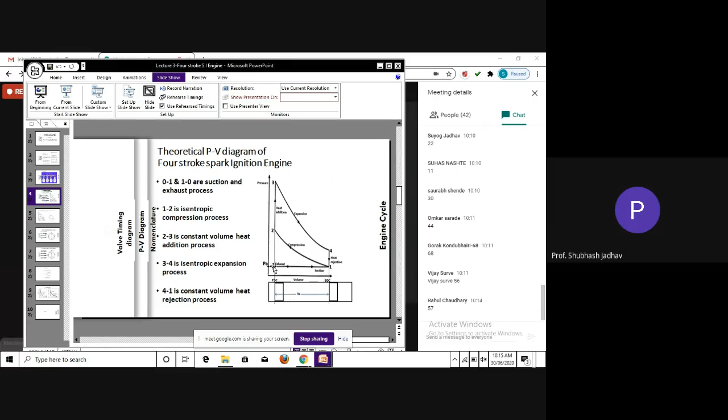And this 0 to 1 and 1 to 0 we generally don't show in our theoretical Otto cycle. So that becomes a very important thing which you have to remember.

And after understanding this particular PV diagram or Otto cycle, then we said in a similar manner we can go for discussion of the diesel cycle also. So you can see over here a comparison of the Otto cycle and diesel cycle. You can see a similar, the same figure I have put over here.

Here you have the suction, compression, heat addition, expansion, heat rejection, and the exhaust process.

Similarly, here 0 to 1 will be suction. During suction, the piston moves from TDC to BDC, so suction is happening. Remember, in a diesel cycle we are not allowing an air fuel mixture, rather we are allowing only air to come into the cylinder. So air is sucked into the cylinder in the process 0 to 1, corresponding to intake or suction process.

Now 1 to 2 is your compression, isentropic adiabatic compression. Why didn't we discuss adiabatic earlier? Adiabatic means we are not allowing heat to cross the boundary, correct? So through the boundary of the system, heat is not allowed to go out. We ensure that whatever heat is being produced is retained inside and takes part in the process. So that is why we call it adiabatic, and ideally we are assuming it to be adiabatic.

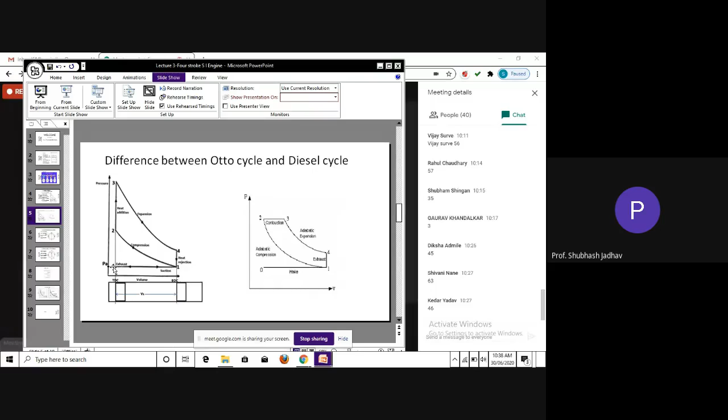So this we are talking theoretically. When we put the same thing in a graphical representation, it is what we call a timing diagram. Let us start initially.

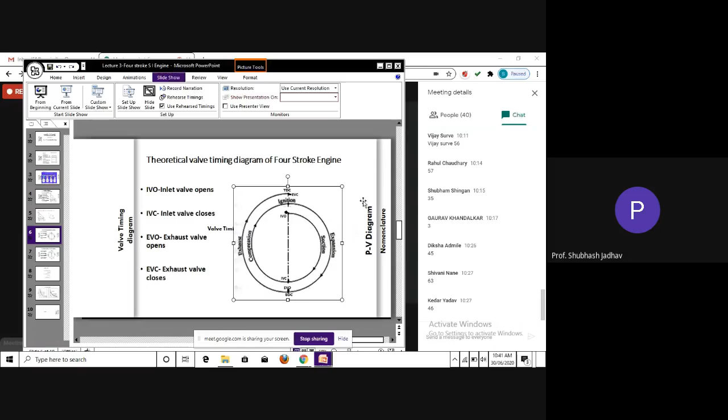And we can see over here ignition is going to be there - spark is going to ignite. This is the point at top dead center. At point 2 we say we are giving the spark theoretically, correct? So the spark is given over here, denoted by ignition.

So at the top dead center, that is, we generally say at the end of the compression stroke, the spark is given - that is, ignition is happening.

Now why does this word ignition come in? Ignition is the process whereby we ignite the mixture, we burn the mixture, with the help of a system which we call an ignition system. That is where the word ignition is coming from.

Till now we were just using the word burning or giving spark. The spark word comes from the process of giving the spark in order to burn. So spark happening and ignition happening are one and the same. So it is ignition over here, and at point 2 we have ignited it.

Still both valves remain closed, and here combustion starts. In a 4-stroke SI engine, we assume that the ignition is going to happen instantaneously at point 2, so the piston is not moving. All the combustion is going to happen over here only, and thereafter the expansion is going to happen.

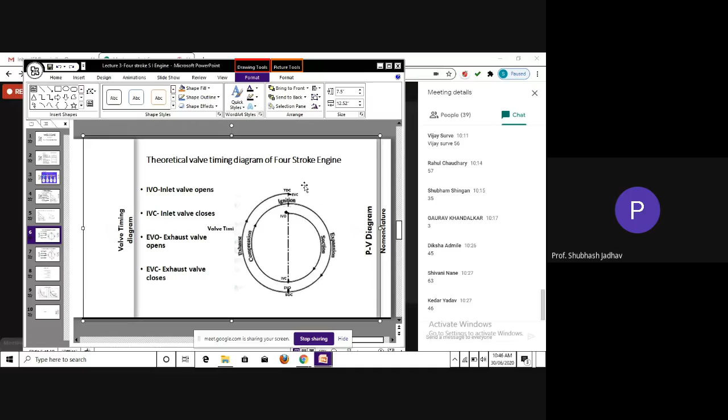So this is very important, underline the word theoretical. This is a theoretical valve timing diagram. Theoretically it should happen like this, but not necessarily in practice. It may happen differently. So theoretically, we have suction, compression, expansion, and exhaust happening, and correspondingly we have this particular theoretical valve timing diagram.

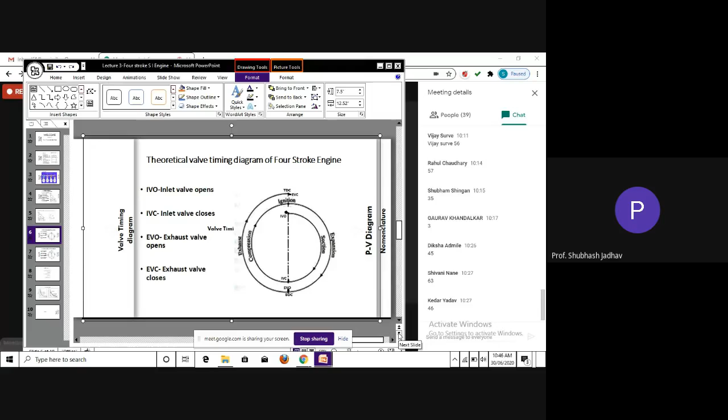Now this is your actual valve timing diagram. Before going to the actual valve timing diagram, we have to understand why there is a difference between the theoretical and actual valve timing diagram. Now earlier, in our earlier cycles, we discussed about this, so let me check if that PPT is with me, so that we'll be able to understand properly. One minute.

Okay, so this is the arrangement where we operate the valves, correct? Now here you can see in the theoretical diagram, we are assuming that we open and close the valves at dead centers, either top dead center or bottom dead center. So either opening or closing is generally done at a dead center, which means it is instantaneous.

But you can see over here, this is a mechanical operation, and the mechanical operation cannot be done instantaneously because it has some inertia. So if there's inertia and you are applying a force, remember, you have to slowly go on increasing the force, and then it will start moving. Until it moves, it will consume some amount of time. That means there will be some amount of time required due to its inertia. That's the first thing.

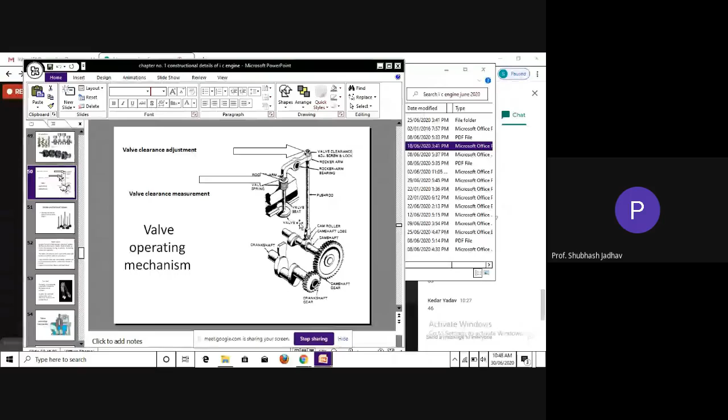Okay, so these are the cam lobes, which are going to make the valves move. Now you can see over here, this is a cam lobe. This is called a cam lobe. This is a cam shaft.

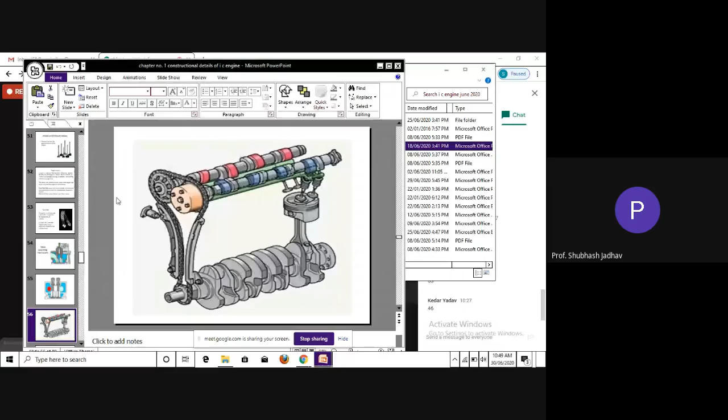Now here it is up to somewhere having the same diameter, but here the diameter is going to increase and become maximum over here, so it is clearly visible. You can see from here to here it is increasing, and then it is going to decrease. So this is the region where it is going to lift.

Since the diameter is increasing, the follower is going to be lifted up. That means there is the inertia of the follower coming into picture. So if the follower is supposed to be pulled, the inertia has to be taken care of, and due to that we cannot make it move suddenly. So we have to go slowly, which means it will consume some amount of time.

Moreover, what is the shape of the cam? The cam is something like here. It will be initially half of the part. Let us assume it is circular, and then it will be like this. This portion is called the cam lobe. So this particular cam lobe, like this, is going to push the follower up.

Now, in order to make this happen, we have to ensure that the cam lobe is designed in a proper manner. If you suddenly want to make it move from up to down or down to up, then the cam lobe shape cannot be like this. Initially it will be circular, and there will not be any motion. If the cam lobe is circular, no motion will be there.

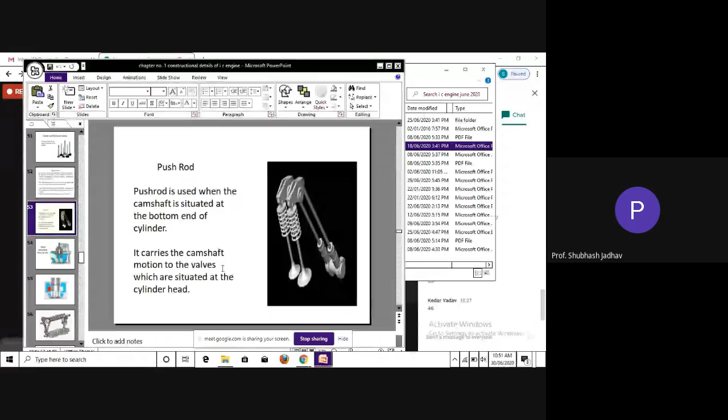If you see the cam lobe over here, it has to be the same diameter, and then suddenly wherever it is increasing, instead of that, up to here it will be the same diameter, and suddenly it has to increase like this. That means the follower will come here and suddenly it has to move up, or from this side if it is coming, suddenly it will move down. So there will be a sharp decrease over here, which is not possible.

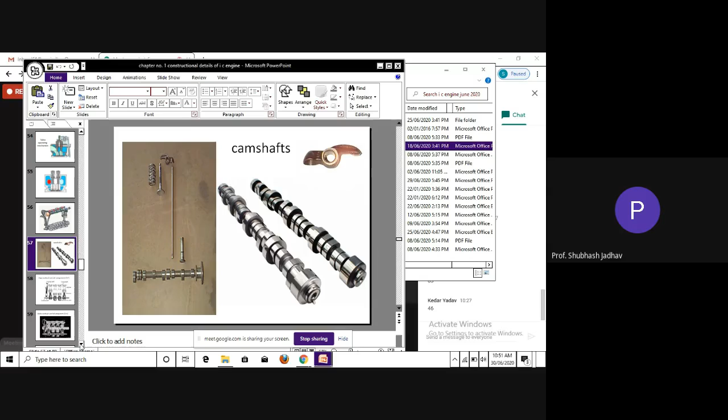And therefore this arrangement is not possible. If that was supposed to be like that, the arrangement would have to be made that way, which is not possible. So some dynamic process and design parameters come into picture, due to which we cannot instantaneously open or close the valves at dead centers.

But theoretically we want it like that. We want the inlet valve to open here, we want the inlet valve to close here, we want the exhaust valve to open here, and we want the exhaust valve to close here. So what has to be done? Because instantaneously it is not going to happen, it takes some amount of time to open and close.

Now we want the suction to happen from top dead center to bottom dead center, so we want the valve to remain open. If you want the valve to remain open at top dead center, you have to start its opening somewhere before the top dead center. So when you start the opening from here, before top dead center, in terms of degrees, some 10 to 20 degrees before top dead center, by the time it comes over here it will be completely open.

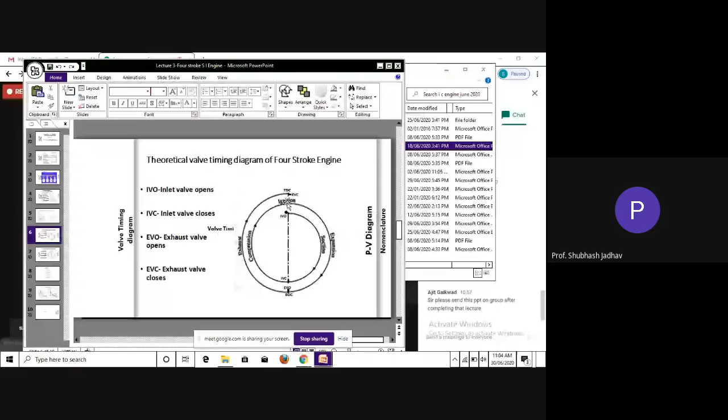Okay, but now again there is some change over here. This particular ignition, whatever we have discussed theoretically, was at point 2, that is TDC. But in actual, the ignition is happening some degrees before TDC. Why? Again, we have discussed when we were discussing the Otto cycle, we have said that we are assuming that combustion is going to happen instantaneously.

Do you feel that the burning process will happen instantaneously? Obviously not. So the burning process will not happen instantly. You've seen many times burning a log of wood in a chula - will it suddenly burn completely? Obviously no, it will not burn instantly. It will take some amount of time to initially start burning.

So here we have given a spark. That spark has to reach all corners of the combustion chamber. Heat has to reach all corners of the combustion chamber to make it burn, and heat transfer has to happen. So slowly the mixture inside the gas is going to burn from the point of the spark towards all sides - the flame is going to propagate. This will require some amount of time.

But what we want is we want the maximum pressure to be applied on the piston when the piston is at TDC, because we want to push it down. So what we do for that is, instead of starting the ignition at that point, we give the ignition spark earlier.

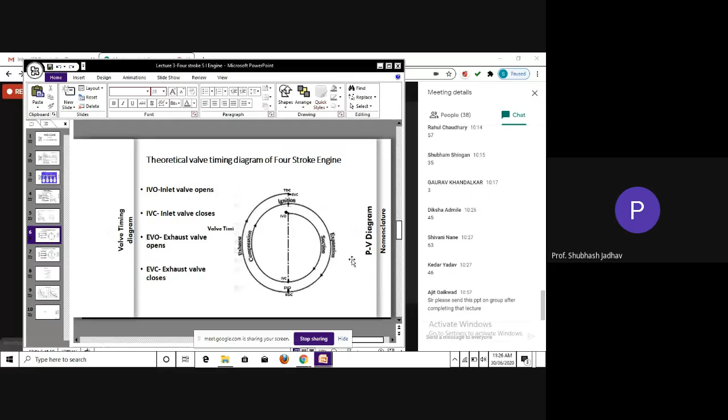So whenever a question is asked about the valve timing diagram, you have to draw the theoretical valve timing diagram first and explain these points, then draw the actual valve timing diagram and explain why these things are happening, depending on how many marks the question carries. If asked for more marks, you can give all the explanation regarding why this variation in the points happens from dead center, why it has to be early, why it has to be late.

Why ignition has to be early, what happens if it is advanced, what happens if it is retarded, and its correlation with speed, etc. All these things you can explain when answering about the valve timing diagram if it's asked for more marks. If asked for fewer marks, your explanation can be reduced, but ensure you draw both the actual and theoretical valve timing diagrams along with the corresponding explanation, and that will be the complete answer for the question.

Explain the valve timing diagram.

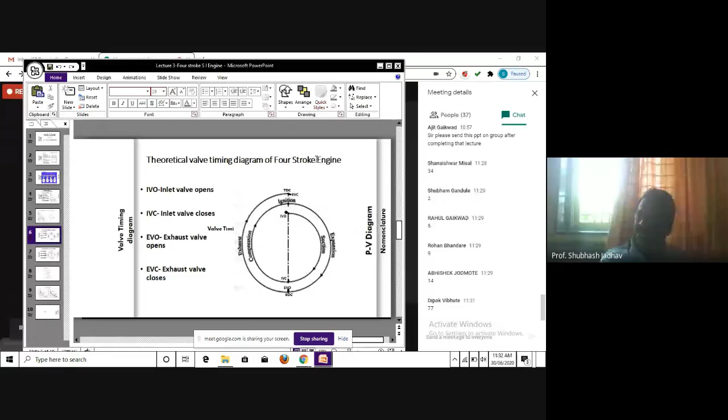Moving ahead, now you can see this is a theoretical valve timing diagram. Why theoretical? Because theoretically we expect this thing to happen like this. Now what all things we expect to happen like this means we have assumed certain things. For example, we have assumed that combustion is going to happen instantaneously. So if combustion is going to happen instantaneously on this particular diagram, the combustion will be only at one point.

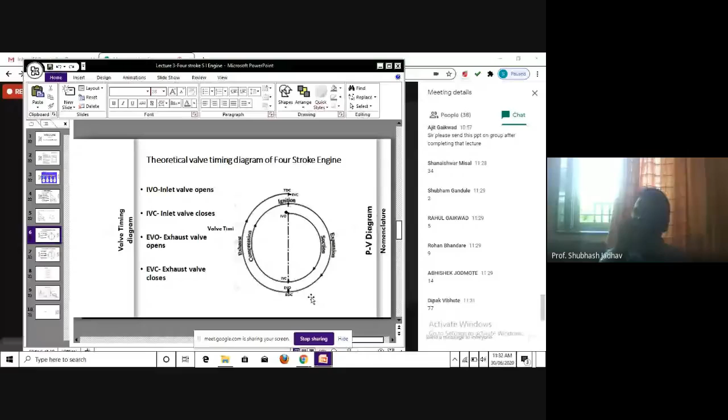It will not be having some amount of angle corresponding to it, right? Because we are assuming that it is instantaneous. We have assumed that the valves are going to open and close instantaneously. So the opening and closing will also be happening at a certain amount of time, but it will be denoted by only a single point.

So that is how we have here at top dead center, we assume that the inlet valve is open, and when the inlet valve is open, suction is being started. By the time it reaches bottom dead center, that is the point when the piston reaches bottom dead center, we are going to close the inlet valve. Now the suction is going to end, both the valves remain closed, the mixture gets trapped, and the compression is going to start.

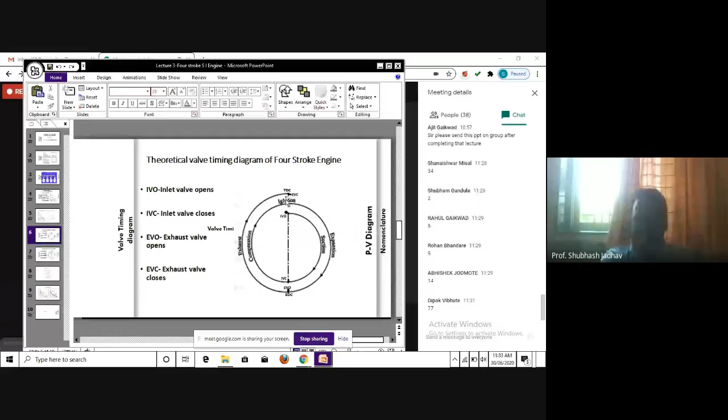At TDC, the spark is given. It is going to burn, start applying pressure on the piston, and the piston is going to push down from TDC to BDC. So when the piston is moving down, it is the expansion stroke.

At the end of the expansion stroke, when the piston reaches BDC, the exhaust valve is going to open. The instant the exhaust valve opens, exhaust gas rushes out to the exhaust manifold, and this continues until the exhaust valve is closed, which happens when the piston reaches top dead center. So here the valves are opening and closing at dead center instantaneously, and along with that, combustion is also going to happen.

combustion is also going to happen. Hello.

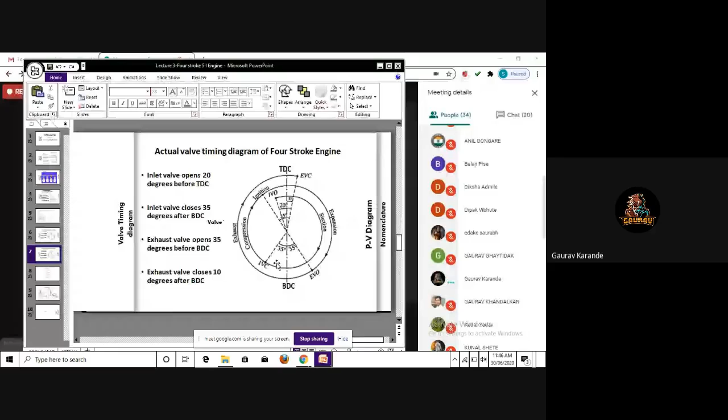Okay, so basically, it was supposed to happen at top dead center. The spark was supposed to happen at top dead center, but actually it happens a certain amount of time before top dead center. This corresponds to the design, where we have fixed a certain angle. Let us suppose it is 20 degrees, meaning it was supposed to happen here, or let us say it is 35 degrees. This particular point is now, according to design, finalized that the spark is supposed to happen at 35 degrees.

But as the speed of the engine increases, what do we have to do? The time required for combustion remains the same, but the time available for combustion becomes less, because at higher speed the engine rotates in lesser time. Since the speed has increased, the net time available for the compression or expansion process decreases as speed increases. That means this particular point has to be moved earlier, so the ignition has to become early. So in order to give sufficient time for combustion to happen, instead of 35 degrees we make the spark happen at 40 degrees. So we have advanced it.

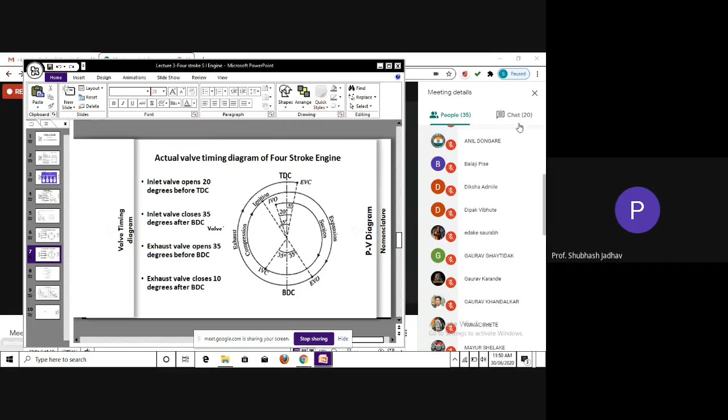Okay. Any other doubt related to the timing diagram for a two-stroke and a four-stroke SI engine? Any other doubt? If you have, you can ask, or else I will give you the second question for your assignment. I'm writing the question in the chat box.

The question is: with neat sketches, explain the timing diagram for high speed and low speed four-stroke engine. Let me read the question once again: with neat sketches, explain the timing diagram for high speed and low speed four-stroke engine.

So the figure will be similar. Initially you have to draw a theoretical timing diagram, then draw an actual timing diagram, then compare the two and state the difference. Let this question be asked for 10 marks, so correspondingly you have to make the answer elaborate.